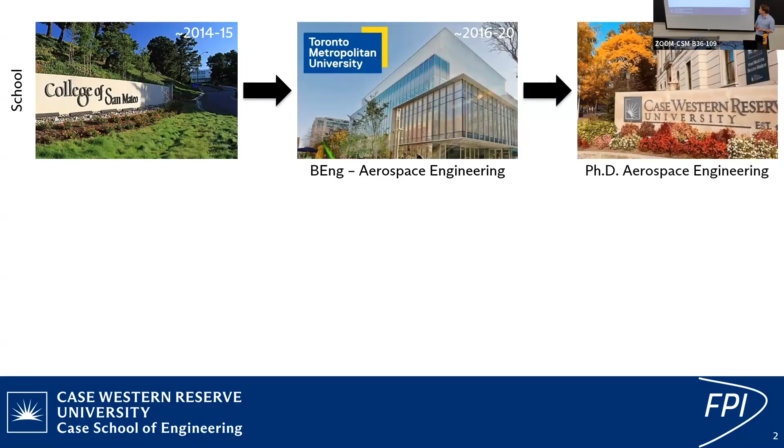But before that, I'll give some background on where I came from. As Professor Mohsen said, about 11 or 12 years ago I was a student here at College of San Mateo, taking math and physics classes at Cañada and Skyline as well. Eventually I went to Toronto Metropolitan University for my bachelor's in aerospace engineering, then went on to do my PhD in aerospace engineering, which I just got from Case Western Reserve University in Cleveland, Ohio.

During this time I did a couple of really cool internships. While at College of San Mateo, I did an internship at Caltech working on an experimental problem called supersonic retropropulsion, which I'll talk about later. I then went to NASA Langley during my PhD for about half a year, looking at Mach 10 shock boundary layer interactions, or SBLIs, and scramjet combustors, plus some image analysis we'll look at later. Last summer I was at Lawrence Livermore National Lab, about an hour from here, looking at high-speed, high-temperature ejecta and working on light field imaging systems. I'll be starting a job there as an experimental physicist in July.

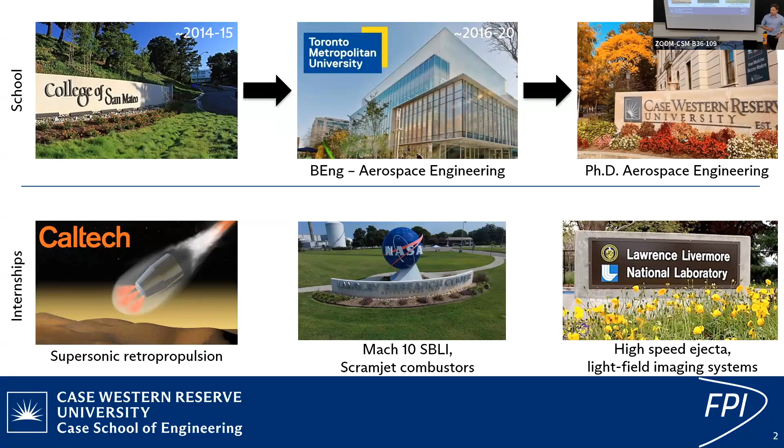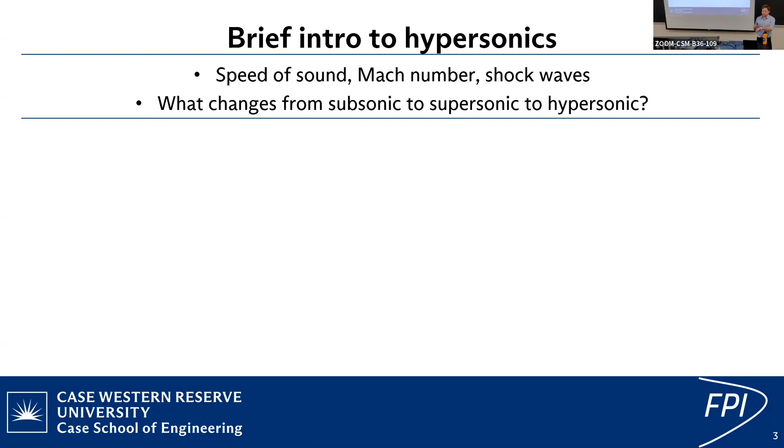So this talk will be structured as follows: I'll give a brief intro to hypersonics to get everyone on the same page. We'll talk about simple concepts like speed of sound, Mach number, and shock waves, and what changes from subsonic to supersonic to hypersonic flow and what that difference means.

Then we'll talk about the subject of my PhD research, hypersonic stagnation point injection, or SPI. We'll go through the motivation behind the problem, some historical relevance, the experimental design for how we study it, and we'll look at some results as well.

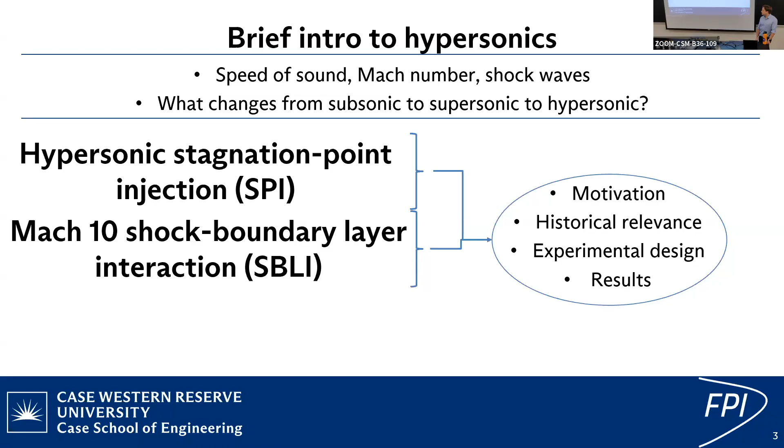Then we'll look at Mach 10 shock boundary layer interactions, or SBLIs, and we'll end with scramjet combustor experiments at the University of Virginia. So we're going to start basic and talk about what sound waves are.

Sound waves are longitudinal pressure waves caused by oscillations of particles. I have a GIF animation we'll see in a bit, but they travel at the speed of sound, which we'll call A. A is material specific: in air it's about 340 meters per second, in water about 1,500 meters per second, and in some types of steel sound travels at about 6,000 meters per second.

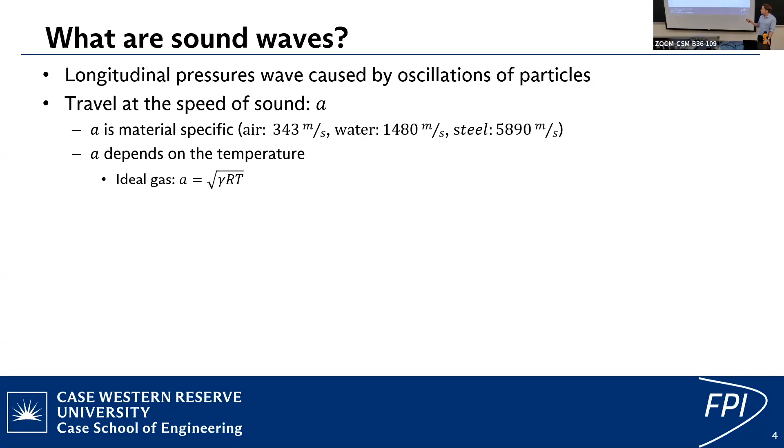It also depends on the temperature. For an ideal gas, the speed of sound is the square root of the specific heat ratio times an individual gas constant times the temperature. Once we've defined the speed of sound, we can define how fast we're moving relative to it, which is the Mach number — simply some velocity divided by that speed of sound.

So if you had an aircraft traveling at 343 meters per second in air at STP, standard temperature and pressure, you would be moving at Mach 1.

Here's a little GIF that shows how these pressure waves move through the air - you can see these collisions and oscillations of particles. Where the air bunches up and that oscillation travels, you have an area of higher pressure, and behind it, where they're spreading out, it's called rarefaction - an area of lower pressure. This is how the sound from my throat is reaching your ears in this room right now.

If we were to plot Mach numbers on a number line starting at 0, we would start in the region called subsonic, between Mach numbers 0 and 1. Between 0 and 0.3 there's an interesting place we call the incompressible zone, where you can use things like Bernoulli's equation, which you might learn about in a physics class.

From 0.3 to 1, you can't really use Bernoulli anymore. It's not going to work ever again past 0.3 without real corrections or completely different sets of equations, because the flow starts to become compressible.

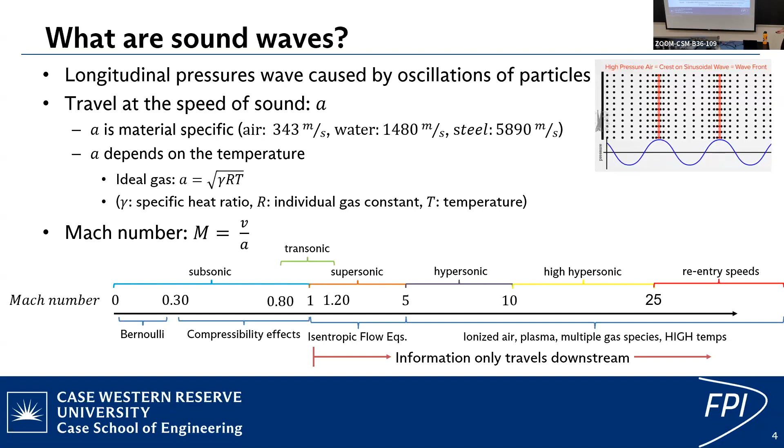One important note about supersonic and hypersonic flows, as it pertains to the difference from subsonic flows, is that information only travels in one direction in this type of flow. I'm going to talk about that now - what do I mean by information only travels downstream?

You've probably seen this in videos, and you actually see it every day as planes fly by. In subsonic flow, when an airplane is passing by or even coming towards you, you can hear it before it's actually reached you. The sound it's emitting is traveling faster than the plane, and that's why the sound reaches you before the plane does.

Now, if you start to accelerate close to Mach 1, those pressure disturbances are going to bunch up, because now the sound of the airplane is traveling at the same speed as the airplane, and it's not going to get to you until the plane gets to you.

When you start going supersonic, you get this cone of influence where the sound this plane is emitting means the plane is going to pass you before you actually hear it. You can see videos of this, like fighter jets flying by out at sea—you see it coming, it passes you, and then you hear it. That's what I mean by information only traveling downstream: the flow didn't really know that airplane was there until it got to that point.

There's no information about this airplane in front of these two angles right here, which are shock waves. So we'll give a brief introduction to shock waves—what are they? They're discontinuous changes in the flow: pressure, velocity, temperature, density, and something called entropy.

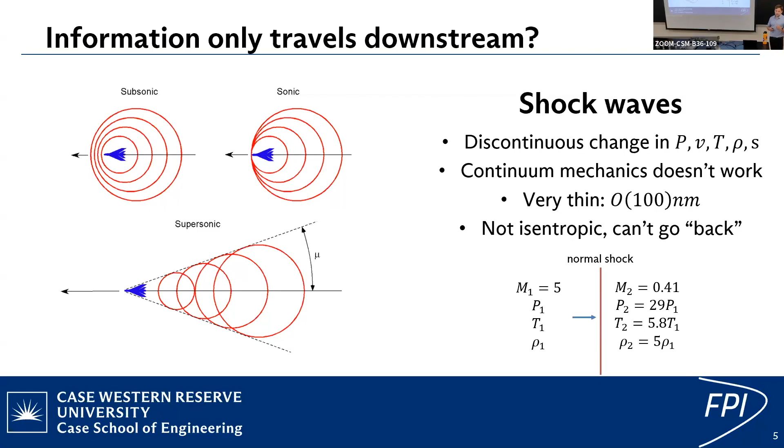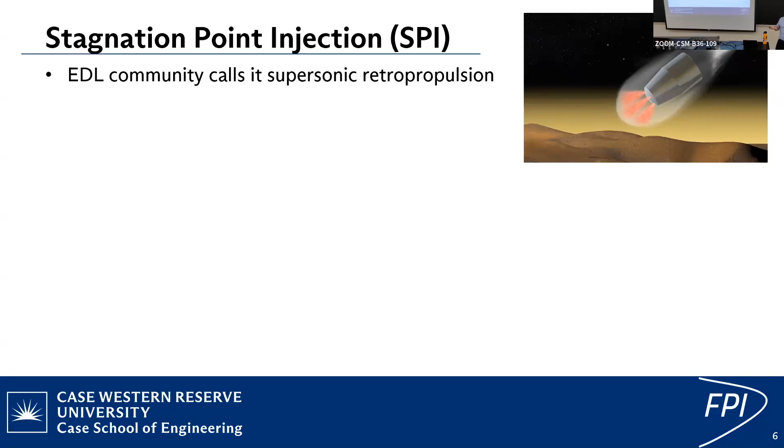So I'm going to start talking about my PhD research, which is stagnation point injection. Stagnation point basically means the front and center of a vehicle—it's where the flow comes to a stop and then has to reaccelerate around the vehicle. I showed this image earlier and called it supersonic retropropulsion, because the entry, descent, and landing (EDL) community calls it supersonic retropropulsion, or SRP.

This configuration is of interest because currently the highest mass payload we've landed on Mars so far is about 2 metric tons. In the future we'd like to land humans, but those payload requirements are estimated to exceed 100 tons, and current EDL technologies just aren't feasible. We've essentially already reached the limit of what's landable on Mars using parachutes, sky cranes, or the bouncy ball landing, if you're familiar with those technologies.

The idea behind supersonic retropropulsion, or SRP, is you'd have a lander—presumably carrying life support systems and astronauts—with rockets added to the front, so you'd be slowing down using the summation of your drag plus the thrust produced by these rockets. So instead of that Apollo capsule style lander with the big blunt front, you now have rockets on the front shooting forward to push you backwards and help you slow down.

We actually see supersonic retropropulsion pretty regularly on the Falcon 9 rockets. These are two videos: on the left, it's infrared, and on the right, it's just a phone video someone took. You can see this giant plume igniting. They call it Mars Relevant Retropropulsion Regime, because this is the enabling technology identified by NASA for landing on Mars.

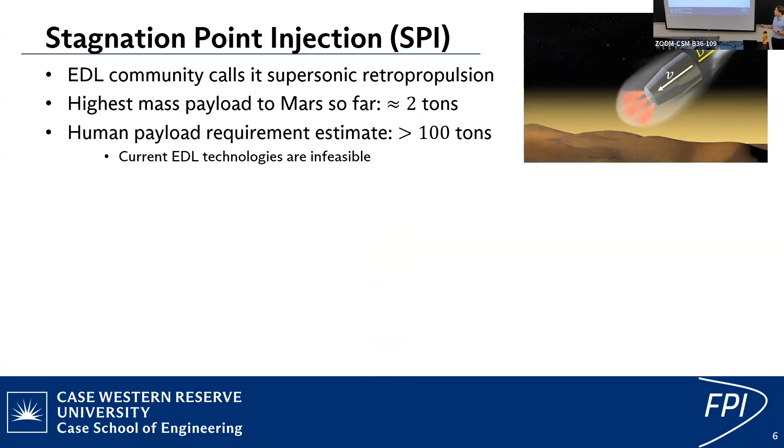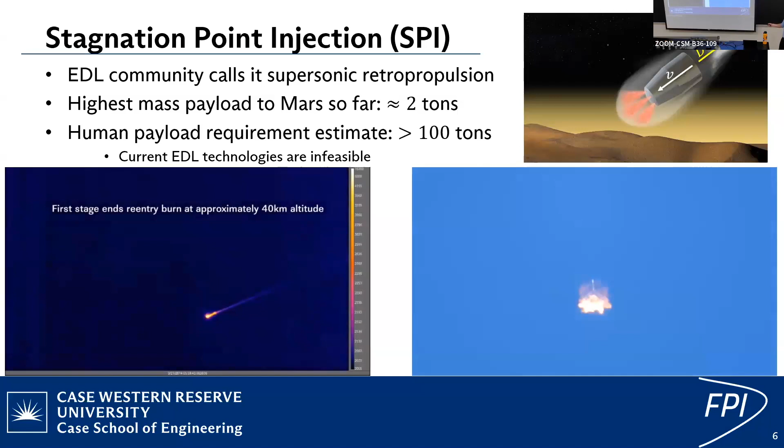So you can see that this tiny little dot in there is the actual Falcon 9. This is a huge bow shock where you can see the pressure jump increase almost instantly. It lights all of its rockets, and there's this huge plume with a bunch of unsteadiness. That's what brings us to the problem behind stagnation point injection: we don't really know what's happening in front of the rockets. The fluid mechanics are really complicated, they're difficult to model, and there's really no answers out there.

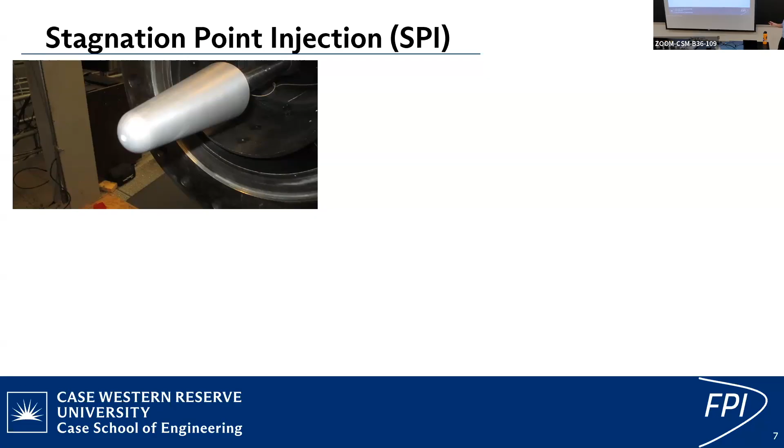This is a picture of one of the models I used in the Purdue Boeing AFOSR Mach 6 quiet tunnel in Lafayette, Indiana. It's an aluminum cone with a little jet right in the front. The diameter of this spherical nose is about three-quarters of an inch. We have some instrumentation in the back, and this thing attached to it is called the sting, which is what holds it in the tunnel.

The primary diagnostic we use is an imaging technique called schlieren imaging. All you need to know is that we're shining collimated light right where we want to view the flow field, to see these flow dynamics. That light refracts with density changes, and we capture that on a high-speed camera. This lets us take high-speed video to view the flow field, interpret the motions, and use math to figure out what's happening.

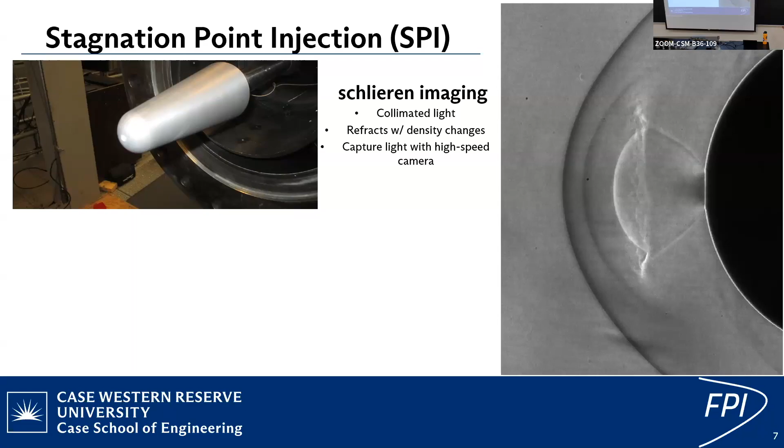This is a picture from one of my experiments. We'll be looking at videos later, but I wanted to show this so we could get on the same page with the terminology. This is the tip of the model, and that orifice is actually firing a Mach 1 jet into a Mach 6 free stream. From left to right is the tunnel flow, moving at Mach 6, and out of this little jet we're injecting gas at about Mach 1. You'll see a whole bunch of features in this image.

To start defining those, we'll begin with the shear layers, which come off the edges of the jet. We have the triple point, which connects the shear layer to the Mach disk, where the jet flow shocks down into a subsonic flow. In this region right outside the jet, it's actually supersonic because it's expanding. We have the contact surface, which is the line between the bow shock and the Mach disk, where the jet flow and the free stream or tunnel flow first interact.

You can see that density change - remember, what we're looking at in this image are changes in density. So this contact surface is where the free stream Mach 6 flow and the Mach 1 flow from the jet first touch each other. As I said earlier, leading edge temperatures in hypersonic vehicles can exceed 10,000 Kelvin, which is about twice the sun's surface temperature.

So we need some other way to cool these vehicles, because the materials we currently have today - this is way beyond their melting point. If we fly something and experience these temperatures, it's going to be destroyed. We need something else to help us reach these speeds. So the idea is that by injecting some flow at the front, we'd be able to lower the heat flux onto the vehicle, provide some sort of cushion, and experience lower temperatures.

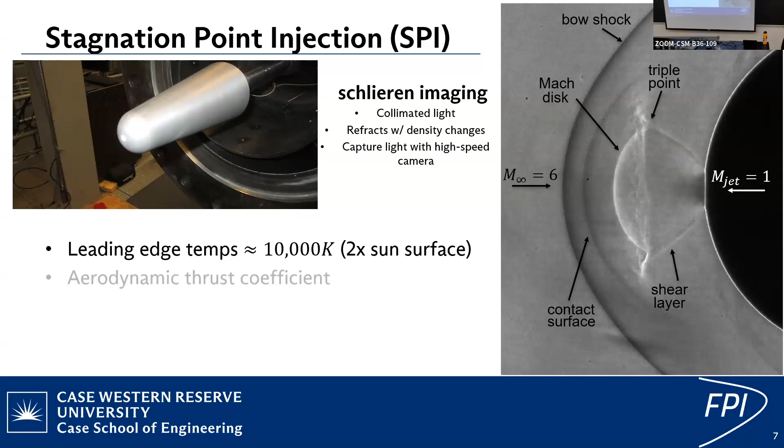Historically, the way experiments have been run is by varying something called the aerodynamic thrust coefficient, which is this universal governing parameter for the dynamics associated with all of these features. It's just the thrust divided by the free stream properties, or the atmospheric properties - you can think of it that way.

So what we're going to do is look at some videos of this. We're going to be varying this parameter, the thrust coefficient, and we're doing that by varying the thrust of the jet by changing the pressure of the jet, which is supplied by a cylinder.

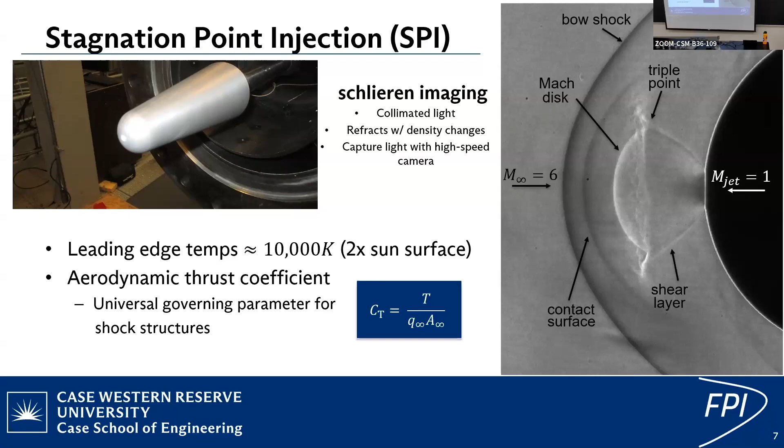It'll always stay at Mach 1. That's just a feature of sonic and supersonic flows. No matter how much you increase the pressure, it's always going to stay Mach 1 because it is a geometric limitation. So we're going to start by looking at these low thrust coefficient videos.

These are taken at 76,000 images a second, so very high speed cameras. When we run the tunnel, it only experiences hypersonic flow for about 3 seconds, and that's actually a pretty long time for a hypersonic tunnel. The one I worked at Caltech was about 1 second. And the other tunnel in the room adjacent to me at Caltech, the total test time was about 30 milliseconds.

So we're using very, very high speed cameras, lasers, all sorts of stuff to try to capture these images. The tunnel I worked at has a special feature where it can run in what's called quiet flow, which essentially means there's no turbulence in the free stream. It's the only hypersonic tunnel in the world that can do that, but I won't really be talking about that today. I'll just be showing videos.

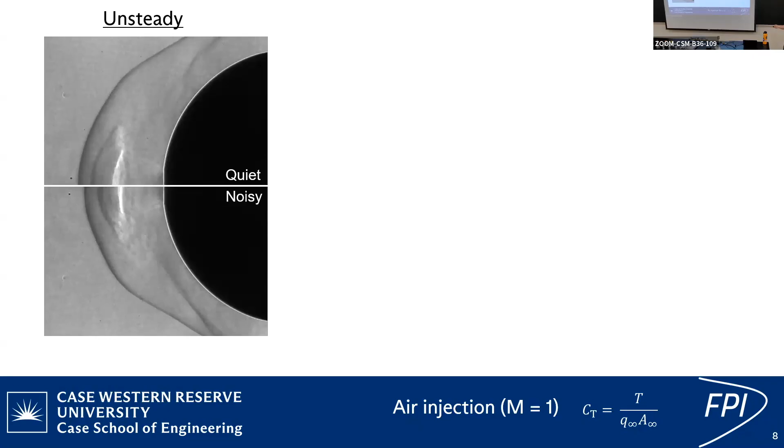While we're looking at this video, we can see there are these big vibrations and oscillations. We can see that the triple point kind of looks like it's moving forward and backwards. There's this bump that appears every time it moves forward, and it travels along the bow shock. We'd like to be able to pull out these motions and isolate them, and maybe look at their energy content as we change the thrust coefficient.

As we continue to increase the thrust coefficient, you'll see that the flow becomes a lot more steady. This is kind of a problem if we were to experience it in flight, but steady flow is nice -- we can design for this because our parameters aren't changing. The temperature and pressure behind the shock aren't changing because the shock is nice and steady.

With all of these fluctuations, all of those parameters are changing constantly, and your vehicle is going to experience these kind of dynamic loads, which are really difficult. At the end of the day, this is changing the force on the vehicle, and so your astronauts are going to get a real bumpy ride if they're running in that.

So you can see at low thrust coefficient, we have this kind of unsteady motion. At high thrust coefficient, we go to this steady motion. So what kind of techniques do we use to pull out different motions and track the energy as we increase the thrust coefficient?

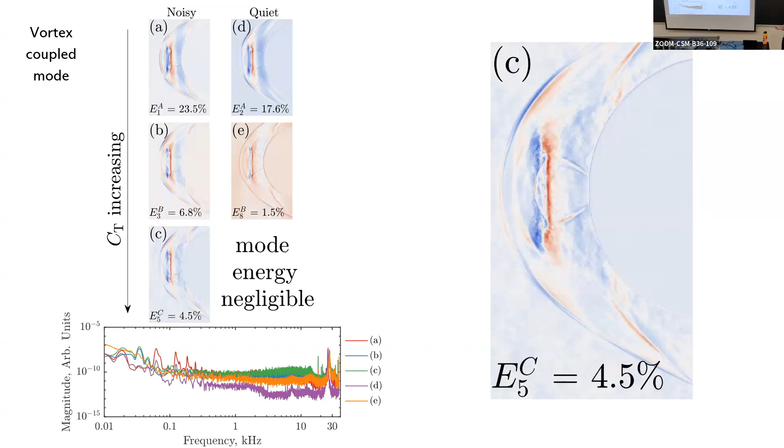As we increase the thrust coefficient, and the flow becomes a little bit more steady, it's decreasing in energy. This technique allows us to pull out this one motion, look at its energy, and it matches what we see in the video. At the same time, we were seeing the flow become more steady, so we're also able to pull out different shapes, such as the longitudinal mode, which is just that forward and backward breathing motion, which as we increase in thrust coefficient, increases in energy—exactly what we saw in the schlieren.

Now, one thing that we can't do with this technique—you can see this in the frequency spectra, which is just showing you what kind of frequencies this mode is really capturing. So if you were to ask me, what frequency does this show from the POD? I wouldn't really be able to tell you, because you have all these peaks all over the place. You don't really know.

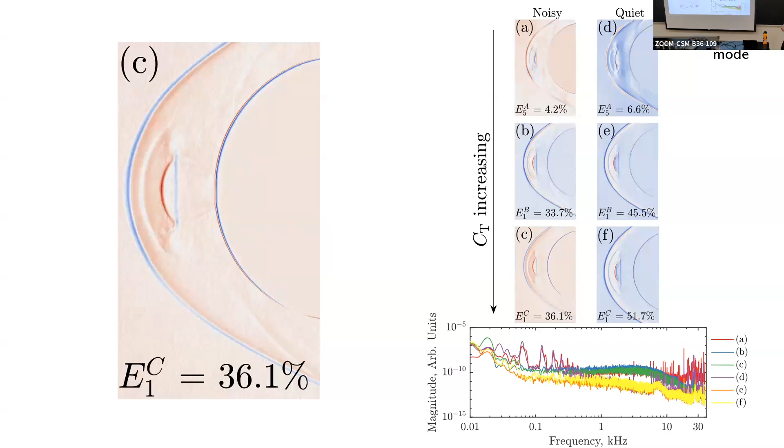But we use another technique called the dynamic mode decomposition, which is another linear algebra technique, and this can pull out these individual modes. You can see this shape before, and maybe it's a little easier to understand what's happening here. You can see this kind of forward fluctuation turn into a perturbation that travels downstream and perturbs the shock right here. It pulls out modes at discrete frequencies.

So now I can say that the mode I was looking at with that flapping and the triple point is happening about 27 kilohertz. I know that the longitudinal breathing motion that's really stable happens at 200 hertz. And I know that this vortex shedding feature coming off of the triple points is happening at about 31 kilohertz.

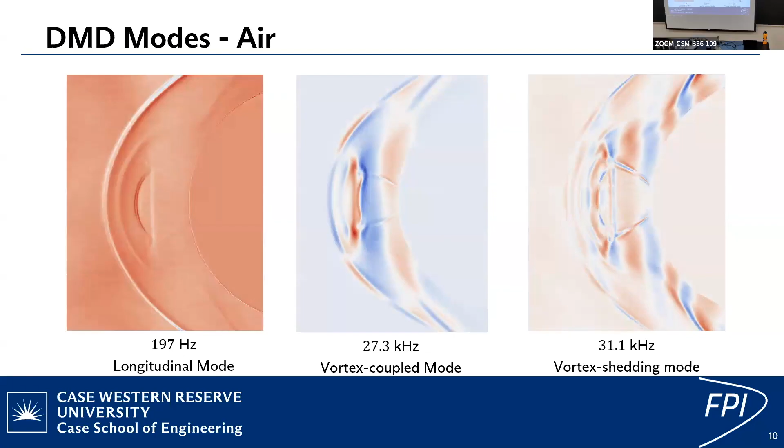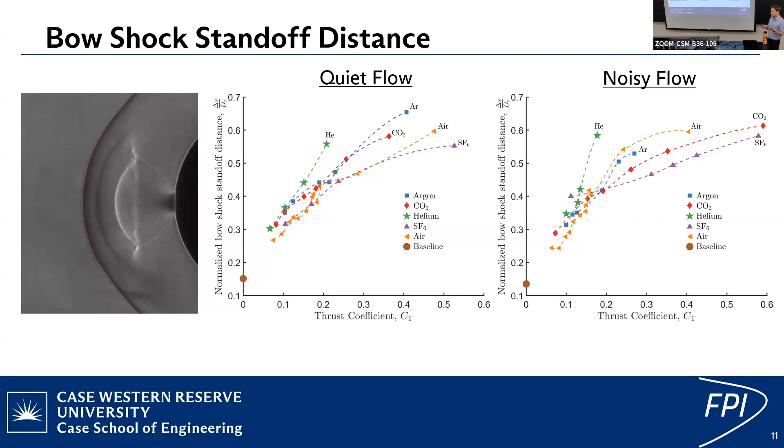Some other measurements that we do: we like to measure how far the shock stands off from the jet. As part of my experiments, I inject a bunch of different gases into the free stream—argon, CO2, helium, sulfur hexafluoride (SF6), and air. Depending on the gas we inject, we get different standoff distances, and even something this simple has just never been done before. People have really just injected air or nitrogen.

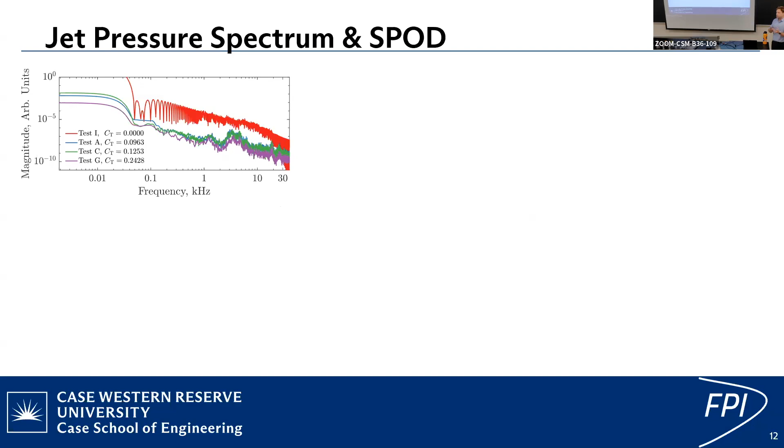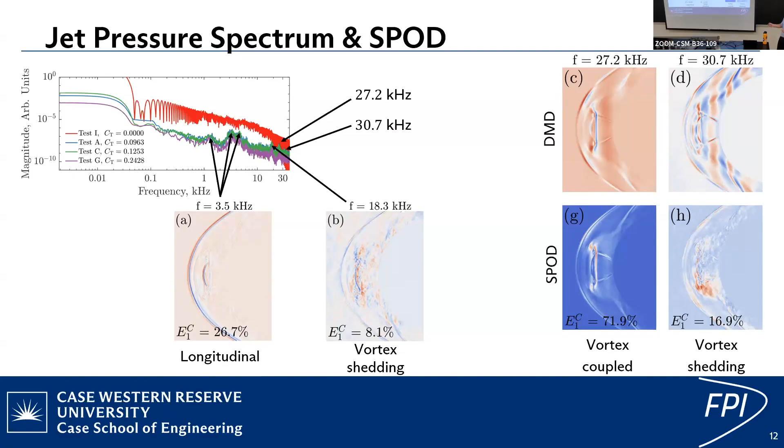Another thing we look at is correlating the frequencies that we see. We measure the pressure in the jet, in the chamber of the jet, where the jet flow is being supplied from, and we can find peaks in the spectra. This is just a Fourier transform of the pressure measurements, matching these different flow features we're seeing in both the DMD, the POD, and something called the SPOD, which is basically the same as a POD—it's just happening at a single frequency.

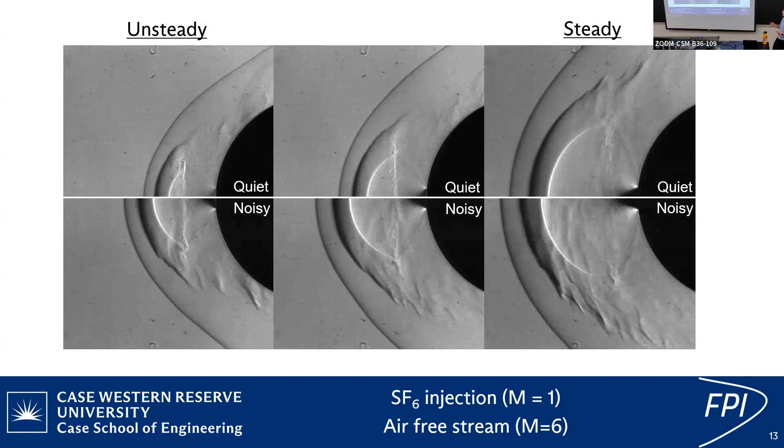Just to show real quick the difference in injected gas: this is injection of sulfur hexafluoride, or SF6, and you can see these really big Kelvin-Helmholtz instability waves forming here. Something like this had just never been seen before in this flow. Actually, you guys in the room are probably one of maybe a handful of people who even know that this exists in this type of flow, because we haven't published it yet.

So, to move on, I'm going to start talking about what a Mach 10 shock boundary layer interaction is, or an SBLI. I will start by showing the schematic.

Basically what happens is you have something called a boundary layer—anytime anything's moving through any type of fluid, gas or liquid, it develops this thin layer of fluid sticking to the surface, and the velocity is actually zero at the surface. Even if you're moving at Mach 5 through gas, the velocity of the gas at the surface is zero, and then it increases to whatever the actual speed is some distance away. These are really, really thin layers, and all the heating and drag that occurs on the vehicle is basically responsible from these boundary layers.

Now, there's something that happens anytime the flow needs to change direction, like going up a ramp. You can imagine all these different shapes going around—like space shuttles, various vehicles, fighter jets, right?

They're not just a tube, they have angles. Any one of those angles, when you're flying supersonic, is going to generate a shock, and that shock is going to interact with that boundary layer. The drag and heating come from what's happening in the boundary layer, so if a shock interacts with it, you get increased viscous heating and potentially increased drag. A lot of things can happen. And this shock is actually moving forward and backwards.

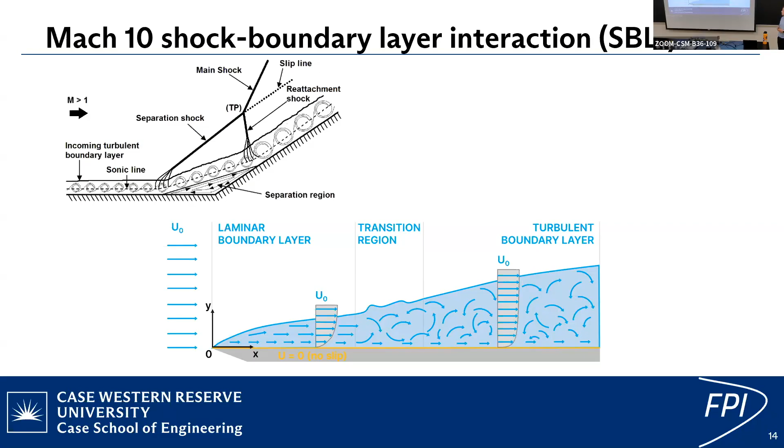So where might you see a shock boundary layer interaction? Basically, anytime you have some kind of geometrical change coming out into the flow, you're going to have a shock in supersonic flow. So anytime you have this kind of change, there's a shock there, and that shock is interacting with that boundary layer, which is responsible for the heating and drag. And you need to know what's going on.

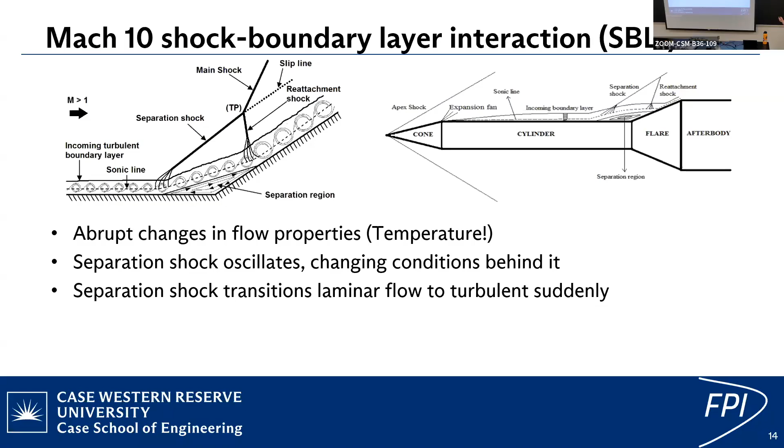Remember, around these shocks, you have abrupt changes in flow properties. Temperature is the one we really care about. The separation shock is oscillating back and forth. When it's moving forward, it sees higher velocity, and when it's moving backward, it sees a lower velocity. So these properties behind it are changing very rapidly. This separation shock can actually instantly transition the flow from laminar to turbulent without going through any sort of transition region.

To give some historical relevance, there was a test vehicle called the X-15, which on one of its tests was carrying a scramjet dummy engine. They wanted to know about running engines in supersonic flows. This was flying at Mach 6.7. Basically, there was a shock boundary layer interaction - we didn't really understand them too well at this time. Right where that shock was interacting with the boundary layer, the temperatures became so high that it melted through the support pylon installed to carry this engine, and the engine just fell off mid-flight.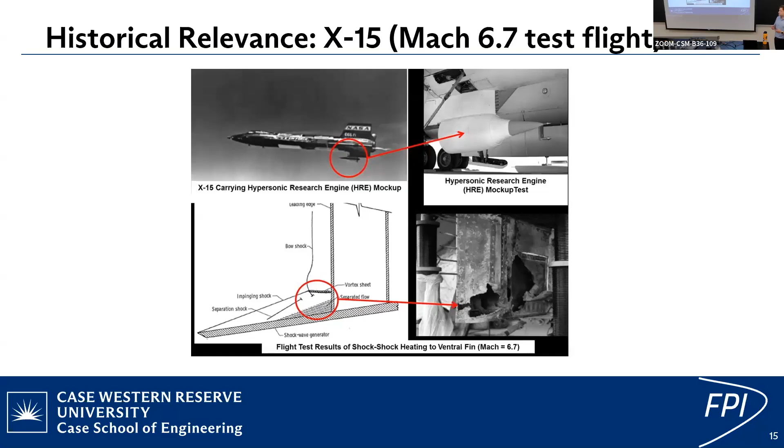These are really important things for us to know about because we want to be able to fly at these speeds. NASA has a Mach 10, 31-inch Mach 10 tunnel. They installed different shapes in the tunnel to generate these shock boundary layer interactions and take video, just like we saw before, the same schlieren images of them.

Here you can see a high-speed camera attached to a bunch of polarizing equipment. This is a specific imaging technique called self-aligned focusing schlieren. It basically works the same way, where it passes light through what you're trying to look at, it refracts, and you capture that back onto a camera.

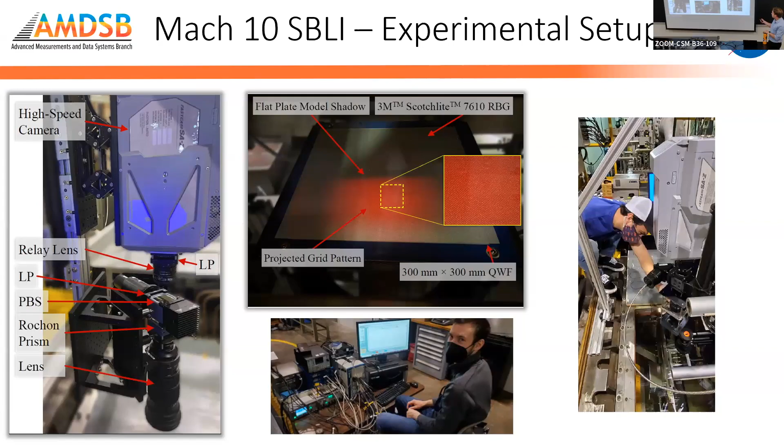This is Josh Weisberger. He's a friend of mine, an experimental researcher there, a really good guy. He's running a whole bunch of what's called the DAQ, the data acquisition system. This is this kind of vertically mounted imaging system, and down here is the tunnel. You can see it here from another view.

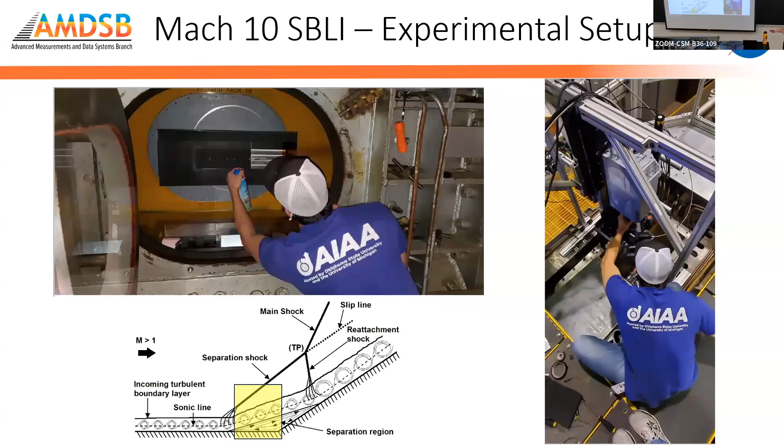So I showed this diagram earlier, and I'm going to show a couple videos now. The region we're going to be looking at is this little highlighted region here, right in front of whatever kind of shape change we're putting in.

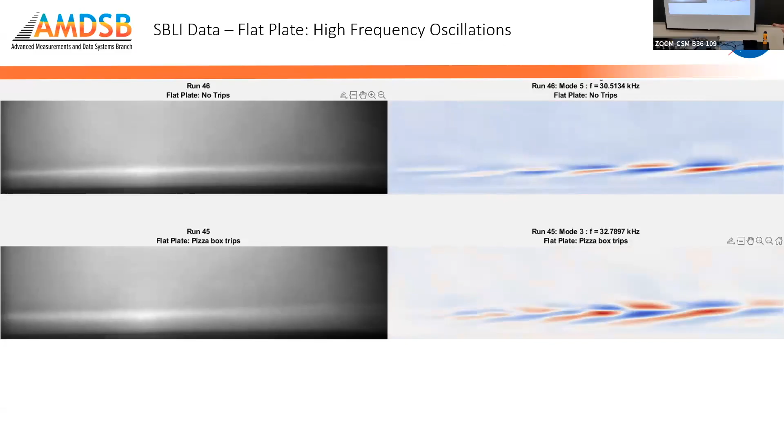And in the tripped flow, which is kind of chaotic and mixing a lot, you can see that it's mixing together a little bit. It doesn't have these nice, sharp delineated regions.

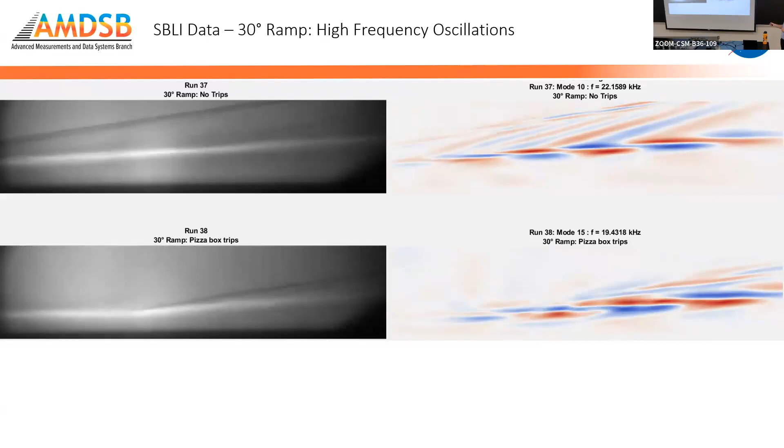Again, looking at the turbulent flow, you can see that there's just a lot more mixing, and now these vortex features are not correlated to the shocks anymore.

Remember, the reason we're looking at things like these is because we want to know what frequency things are happening in the flow, since properties like temperature and pressure are changing relatively close to these frequencies. If the shock is moving at 20 kilohertz and vibrating, then the temperature is also going to be changing at that same frequency.

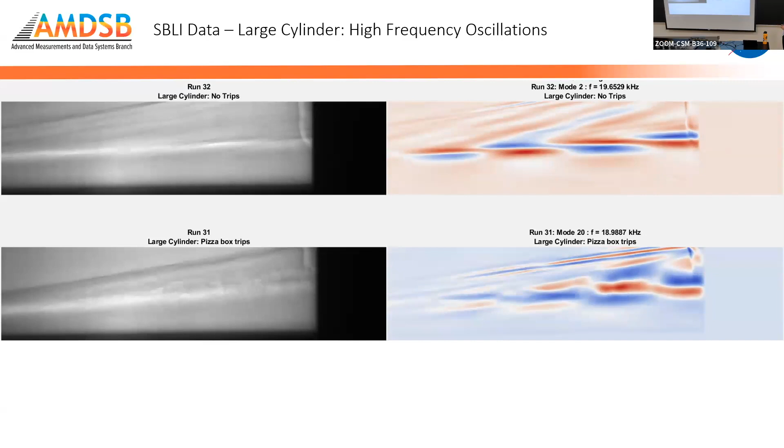So now I'm actually going to start talking about the scramjet combustor experiments. I'll start with a really brief talk about jet propulsion, specifically ramjets and scramjets, and what's the difference, why do we use them.

I talked earlier about shocks and how you incur permanent losses. When you go through a shock, you lose pressure that you can't recover. That pressure is something you would have used to turn into thrust. That's the idea behind engines.

In a ramjet engine, you have supersonic flow coming into the engine. You use compression shocks to decelerate the flow to subsonic. Then you inject fuel, ignite it, and expand it out the back, and it's supersonic on the way out. That's how you generate thrust.

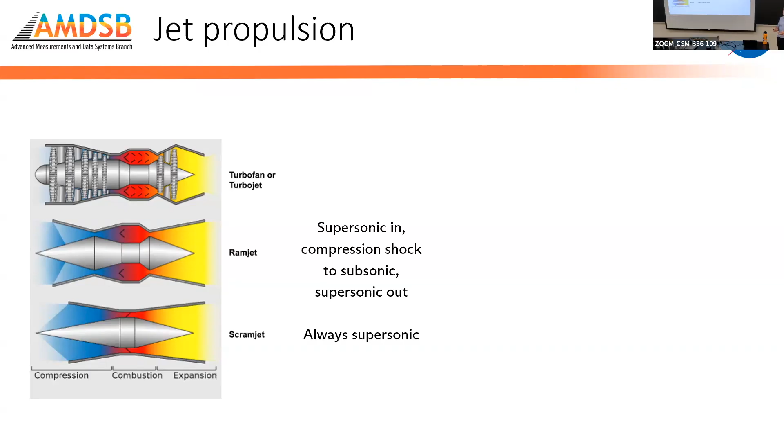With a scramjet engine, which is an experimental concept, we don't have vehicles that use these. The flow is always supersonic. You're still decelerating the flow a little bit, but keeping it supersonic, trying not to incur those permanent losses so much. This is very difficult because now you're trying to inject fuel and light a flame in a supersonic flow. You're traveling thousands of miles an hour, and you're trying to light a flame, keep a candle lit, essentially. So why do we need a scramjet versus a ramjet?

This compression shock to subsonic causes losses that become so great that this engine basically loses all efficiency past Mach 5. So if we want to fly faster and faster, we really need scramjets.

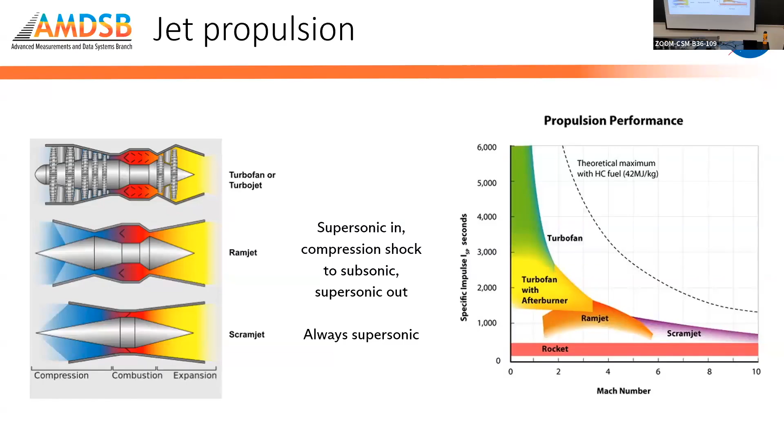You might have heard of the concept of an SSTO, a single stage to orbit vehicle, which can take off on the ground, go all the way to space, and come back without any rockets dropping off, like the space shuttle or the Falcon 9s. If such a vehicle would ever exist, it will use a scramjet engine.

One place you might have seen ramjet engines is the SR-71. The Blackbird has two J58 ramjet engines on the back. If you know anything about it, these little nose cones actually move forward and backwards depending on how fast the plane is flying, because it's trying to catch where that shock is perfectly, to minimize those pressure losses. It flew about Mach 3.2.

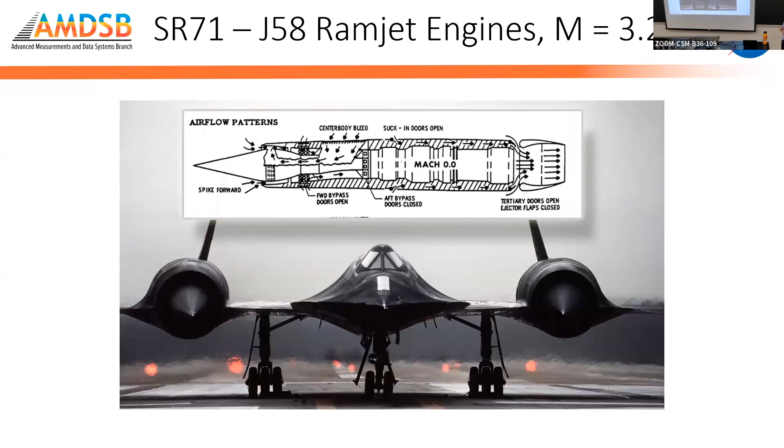For scramjet aircraft, which are experimental, you can see just a couple mock-ups here. This is kind of like the SR-72 from Lockheed Martin. These are just renders, so they're not real aircraft. This is kind of a NASA Wave Rider.

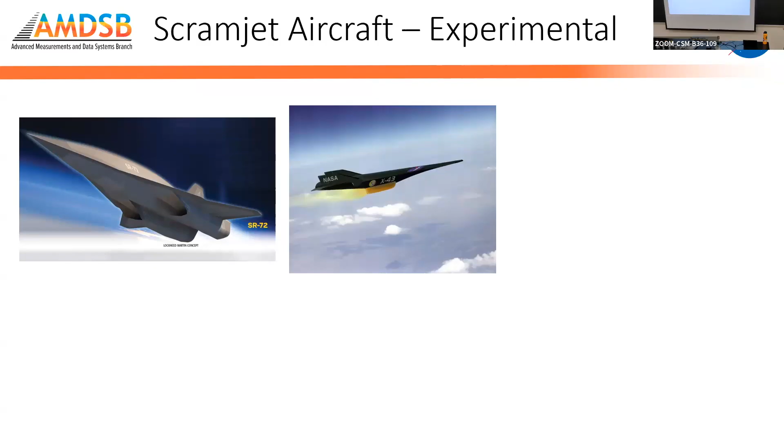If you've watched any movies recently, you'll know that Tom Cruise actually flew one of these at Mach 10 in the movie. An interesting story about this is they built a really detailed life-size model of this plane and kept it at one of Lockheed Martin's hangars. Chinese satellites actually saw it and thought it was a demonstrator aircraft for a hypersonic vehicle, and directed other spy satellites to take more images before realizing it was a movie prop. So it's kind of funny.

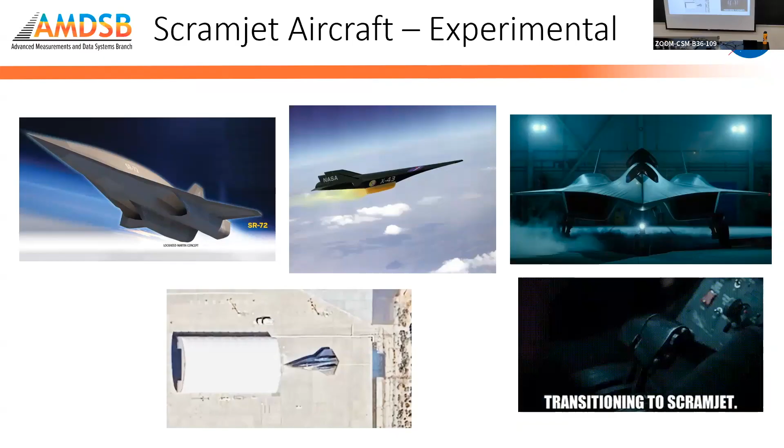At the University of Virginia, there is a scramjet combustor experimental section, which is actually vertical right here. Again, they're using this kind of SAFS system, which is essentially a schlieren system, with a bunch of polarizing optics and a really high-speed camera. It takes about 110,000 images every second.

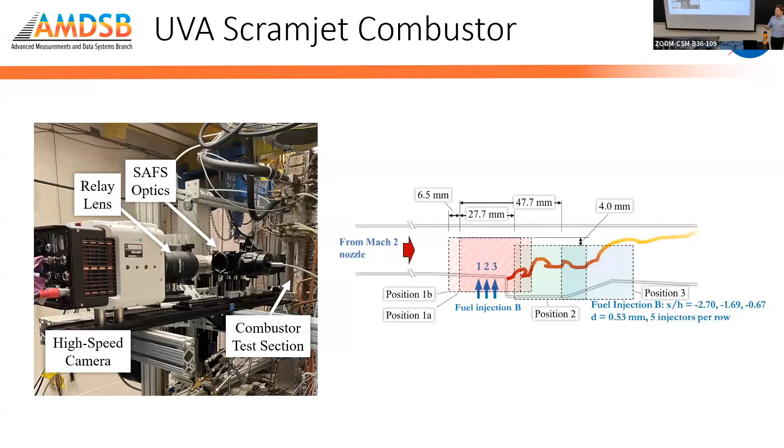This is vertically oriented, so the top is right here and the bottom is over here, and you have a Mach 2 nozzle. What I'm going to be showing is video and analysis from 3 different parts of this combustor section. We're going to look at where the fuel is being injected, just downstream where there's this kind of cliff inside of the combustor, and at this kind of little ramp section. We want to learn about how the flow acts as it goes from this first to second to third view. These are just still images to give you another idea.

This is kind of fuel being injected into the scramjet engine. Remember, the flow is actually moving twice the speed of sound coming into here. So we're injecting fuel, igniting it, and expanding it out the back.

This is the middle view, so this green right here, and in the back you have this ramp. Even just from the still images, you can see that there are these wave-like features here. This is them stitched together. We'd like to know, what are these waves? Where are they coming from? What's generating them? What frequencies do they exist at? We want to know all of this so that we can learn more about how the scramjet engine is actually working.

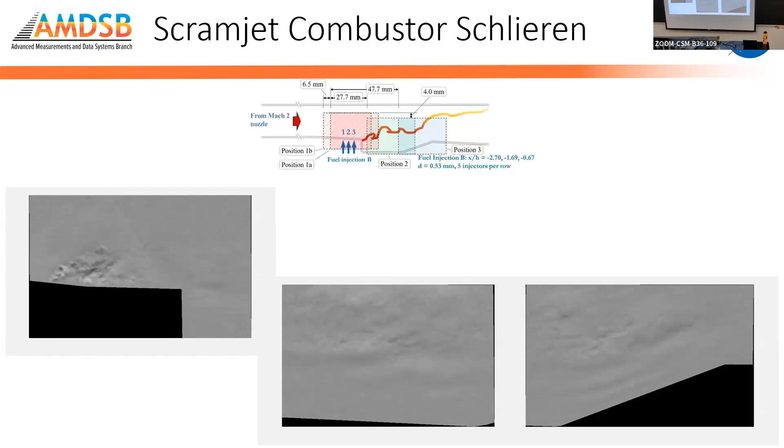Here is some of the raw video, taken at 110,000 images per second. I have the schematic up here again, so you can see this is the fuel injection, and this is a bit downstream of it, near the bottom of this little cliff. There's a ramp a bit further downstream. They're not necessarily synced up, so you can't directly say every time something happens here, you see it there too. They're just independent videos of each of these locations.

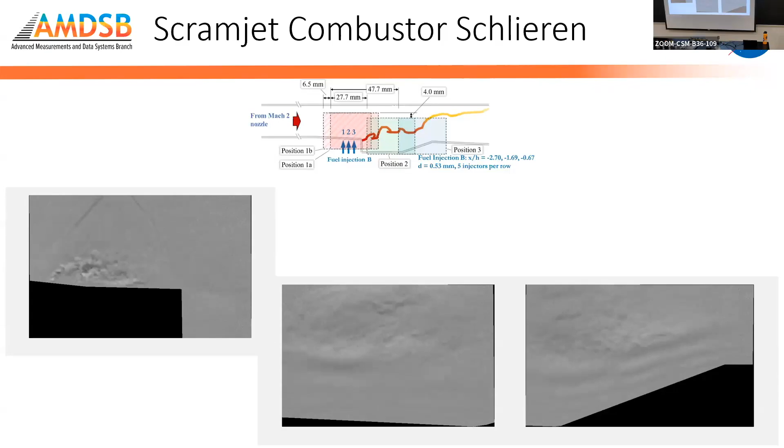We can use dynamic mode decomposition to try to pull out interesting features. To give you an idea of what I see when I look at this, I'll tell you about some of the analysis I did on the scramjet, from videos we published recently. That's informed a next set of experiments with NASA and the University of Virginia, because we found some things that were pretty interesting.

The first thing, not shown here, is that there are fluctuations in the injection system. Pressure changes a little bit, so sometimes a little more fuel comes out, sometimes a little less. That's normal; every system has a slight imperfection. What the DMD shows is that it's fluctuating back and forth, back and forward. First there's a fluctuation on the bottom, then one on the top. That's coming from the fuel injection line.

With every one of those injection oscillations, this shock right here is also oscillating. Because sometimes there's a little more fuel and sometimes a little less, that causes the shock to move a bit further away with more fuel, and a bit closer with less fuel. It's kind of pushing it forward and backward.

Every time there's an oscillation in the shock, all of the post-shock parameters change. We saw earlier that pressure, temperature, density, everything changes after you move past the shock. So if it's oscillating, everything after it is oscillating too. Every time there's an oscillation here, there's a little expansion changing around this cliff, and it's actually shifting to a different Mach number each time it moves around this geometric feature. Then with every oscillation there's a set of waves, basically areas of different temperature and density, impinging on the surface of the scramjet.

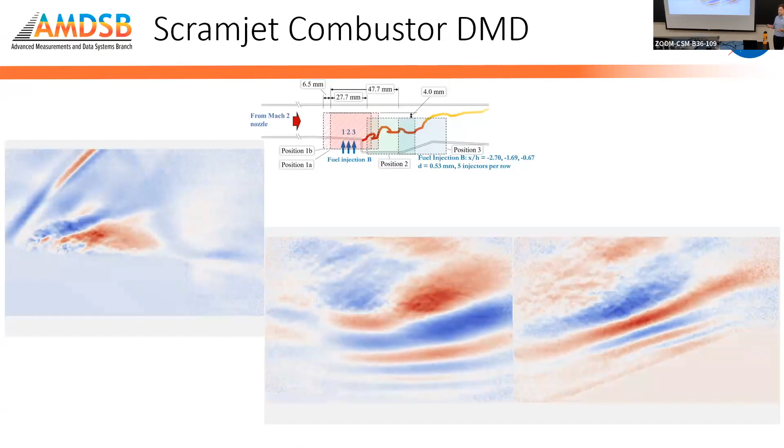This is a real design consideration in all of engineering, so it's really important. That's the end of my talk, and I hope you enjoyed it. I just wanted to show you some open problems in hypersonics, stuff that I've worked on. Like I said, I used to be a student here, like many of you, about 11 years ago. So I hope you thought it was cool.